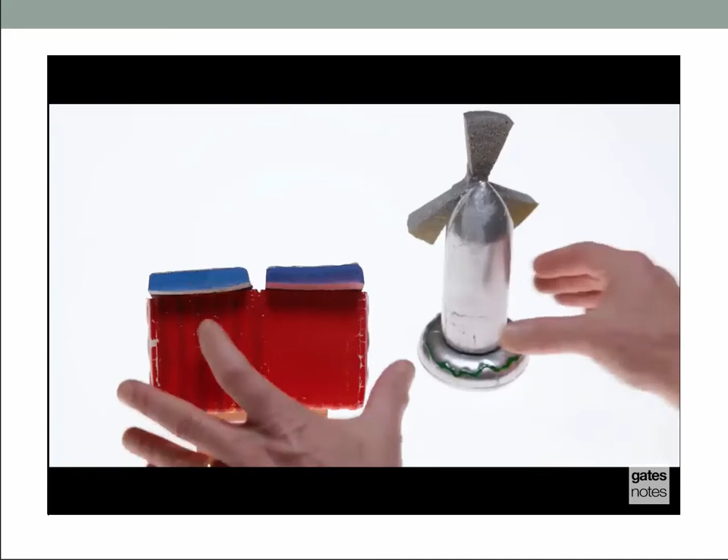Well, let's talk about climate change. Now, people think, hey, aren't we getting solar panels and windmills to be a lot less expensive? And isn't that helping reduce greenhouse gases? And the answer is absolutely. But there's a lot more to do than just taking electricity to zero emissions.

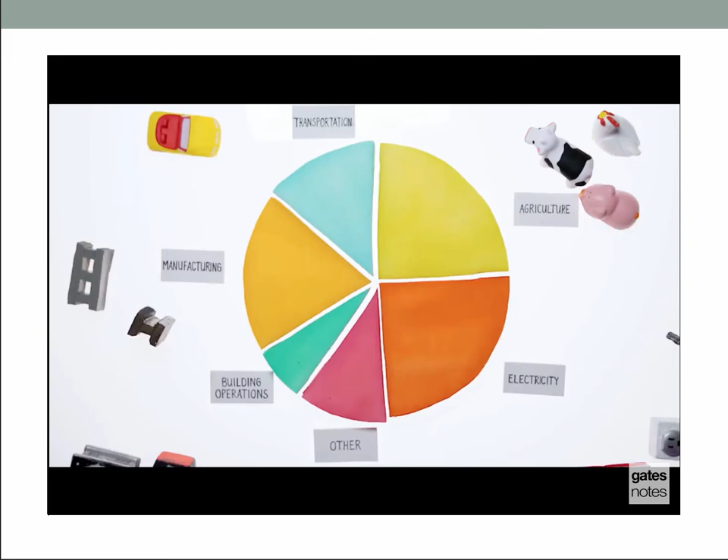There's a variety of things that generate greenhouse gases. We have a lot of sectors of the economy, like manufacturing, that are emitting greenhouse gases that aren't talked about as much. Manufacturing, everything we make, even a cute little squishy like this, that's emitting 31% of the greenhouse gases.

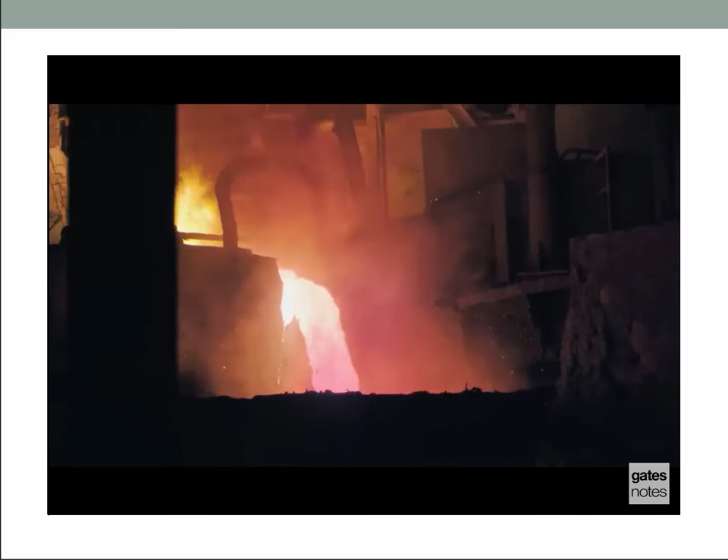The number of buildings in the world is going to double by 2060. It's like we're going to build a new New York City every month for the next 40 years. It's a gigantic amount of materials. Steel, cement, wood, all emitting greenhouse gases. We're going to have to figure out how to make all these things in a different way. And so we're going to need a lot of change, a lot of innovation to bring the emissions from all those areas down to zero.

So Bill Gates tells us we're talking about rebuilding New York City every month for the next 40 years. That's crazy, but a good estimation with urbanization and our crumbling infrastructure. And so what does that mean for civil engineers? There's a lot of emissions. And so we need to understand how our materials are made, how we can make them greener, and what impact we can have as civil engineers. And that's what Civil 115 is going to start you on the path of understanding.

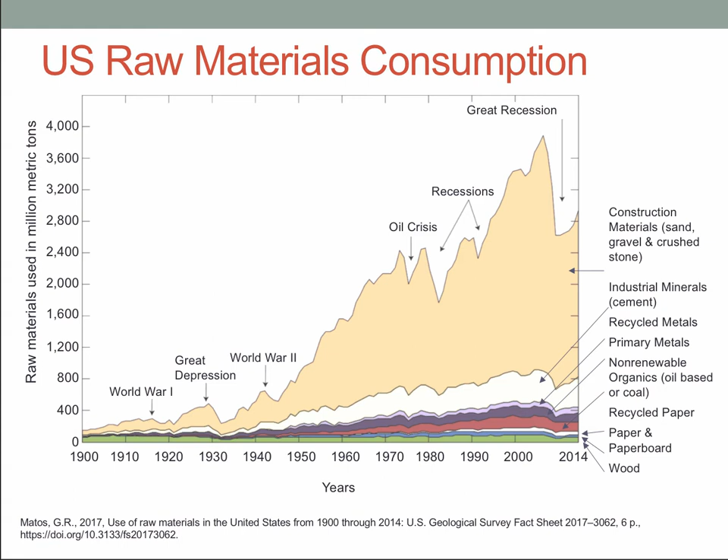Now, when we look at, not only are we greatly increasing the number of raw materials we're consuming, we have to look at too, are we consuming renewable or non-renewable materials? That same report let us know that back in the 1900s, we were about 50% usage of renewable materials and 50% non-renewable. In 2014, that was 4% of our raw material consumption being renewable materials. And we have to look at that if we want to look at how we say sustainable in what we're doing.

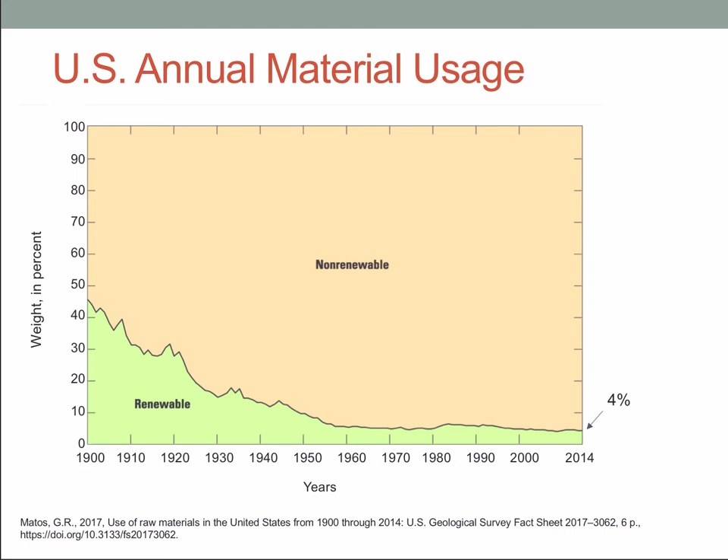Now, you could say, well, gosh, if you look at that increase in material usage, it really happened after World War II. There was a baby boom, we had a huge population growth, and that's true. But if we look at not just the US, but the world growth in raw material consumption, we actually see between 1961 and 2012, the population grew by 228%, but our consumption didn't follow that path. For steel, that grew by 426%, and much more concerning is our cement, which grew by over 1,000%. Wood we can actually see reduced, which is interesting. Plastic shows the greatest increase, but we do need to remember that was invented in the 50s, and so its growth is going to be exponential in that time period.

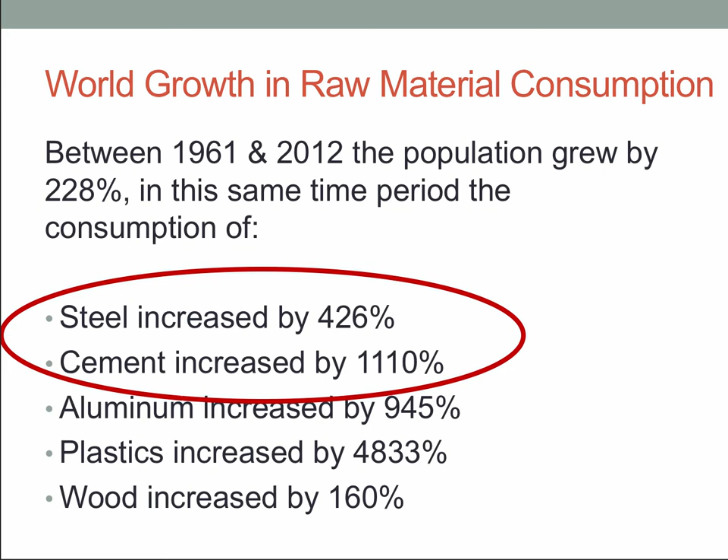Now, I said that the increase of cement was really, really concerning, and to understand this and understand its implications, and something that's going to be really important for you throughout the quarter, is knowing the difference in cement versus concrete. They are not the same thing.

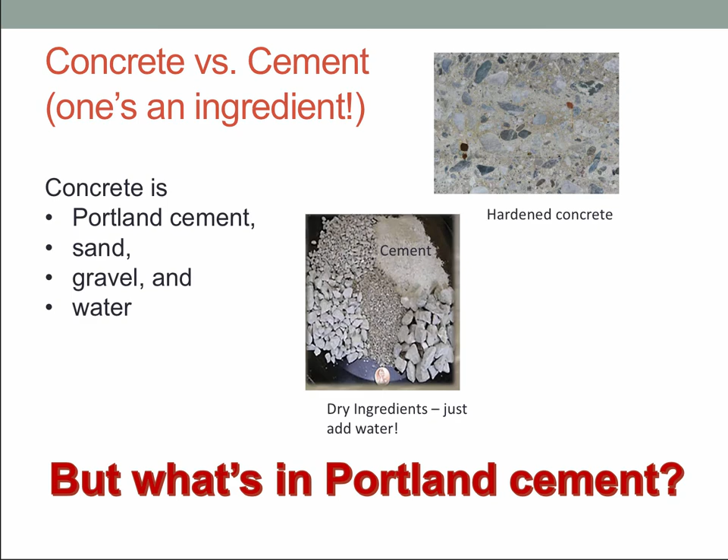Now, cement is an environmental hazard. And why? What is in Portland cement? So we need to really look at this. And we could wax poetic about the cliffs of Dover, the white cliffs of Dover in England, because they are made from limestone, which is calcium carbonate, which is one of the main ingredients in cement. So here's how we create cement. We will spend a week and a half or more going deeply into what's happening inside of cement so that we can actually learn how to make it greener.

In the big picture, we start with our white cliffs of Dover, our calcium carbonate limestone. We add to that some clay, because clay has silica in it, a silica structured molecule. And we mix it together and get it really, really hot.

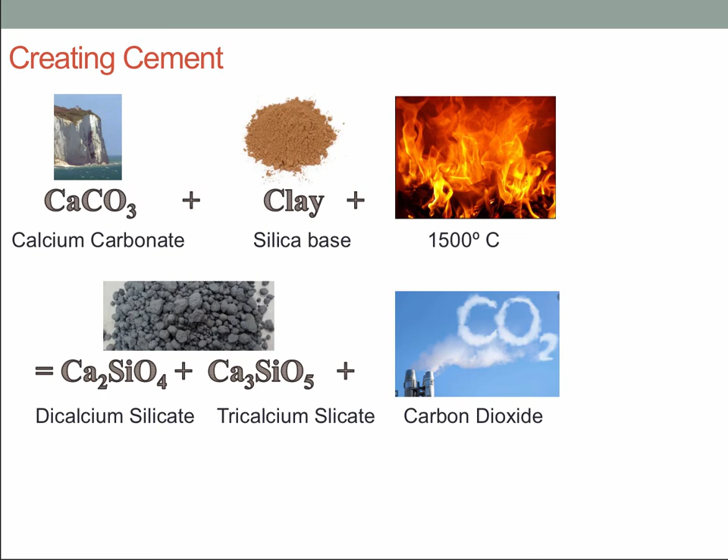What happens is that heat burns off carbon and oxygen, creating CO2, and leaves us with calcium and oxygen combinations called calcium silicates. They could have 2 calciums or 3 calciums, so they're tri or di calcium silicates. Combined, we just call this clinker, and it looks like the ground up little gray granules you see in the photo.

We take that clinker and grind it super fine, like flour, mix it with gypsum, which is the white stuff inside of drywall. That together is literally what cement, or the Portland cement that's most commonly used, is.

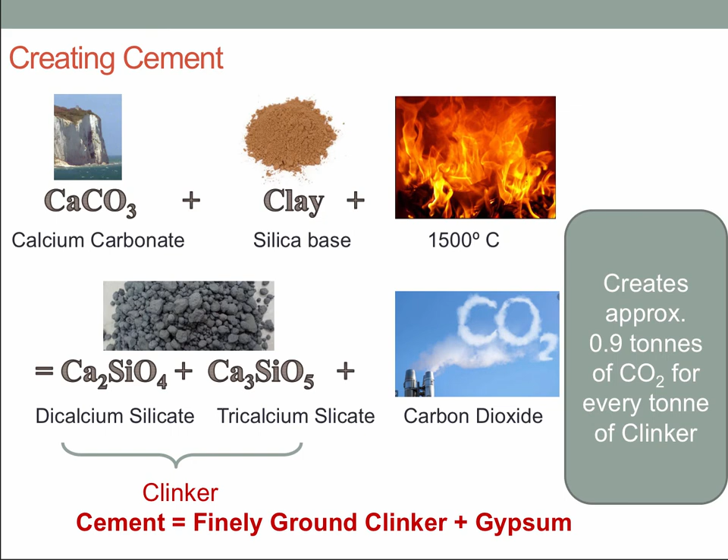But then we get all that carbon dioxide that's literally just a leftover, and that's a problem. Depending on the studies, some will say a little less than 0.9, some will say more, but about 0.9 metric tons of CO2 are created for every metric ton of clinker created. So it's almost a 1-to-1 ratio, and that's concerning, because cement is considered responsible for at a minimum of 5% of all CO2 production in the world annually. So why do we build with it?

What about other materials? What about steel, another material that Bill Gates mentioned? We can have hot rolled steel or structural steel, like the wide flange beams you designed in 44A. Or we can turn steel into thin sheets and bend it permanently at room temperature, cold forming it into other shapes like steel studs, and build a house out of it, or the walls you might put to create partitions and offices inside your structural steel building.

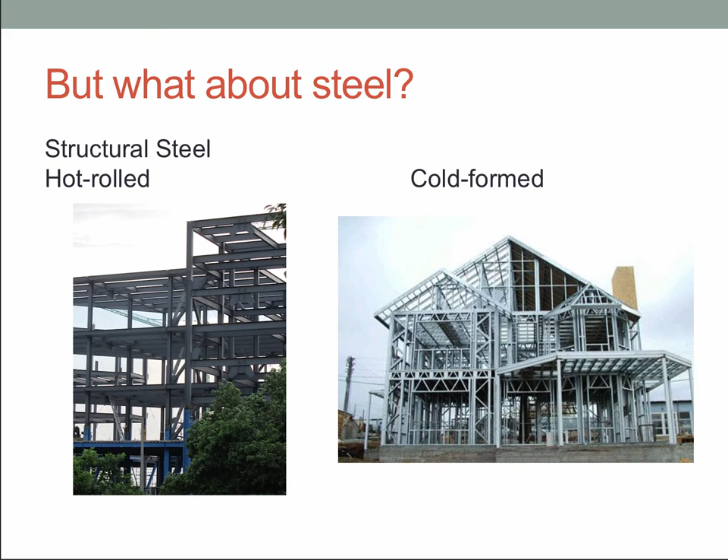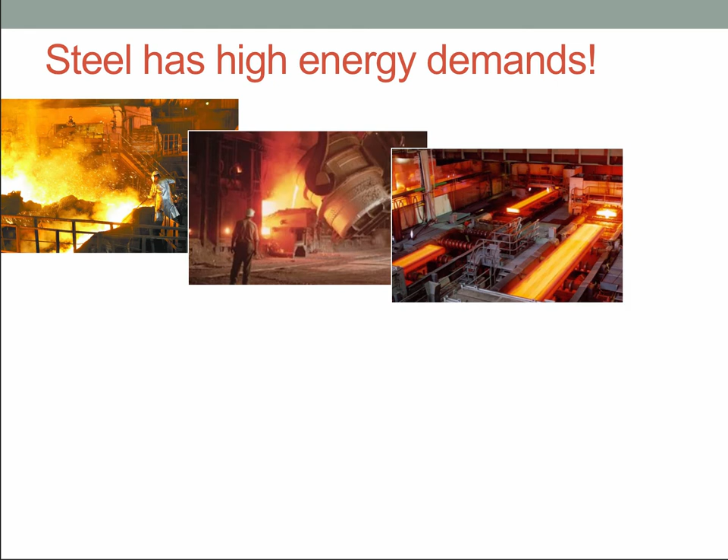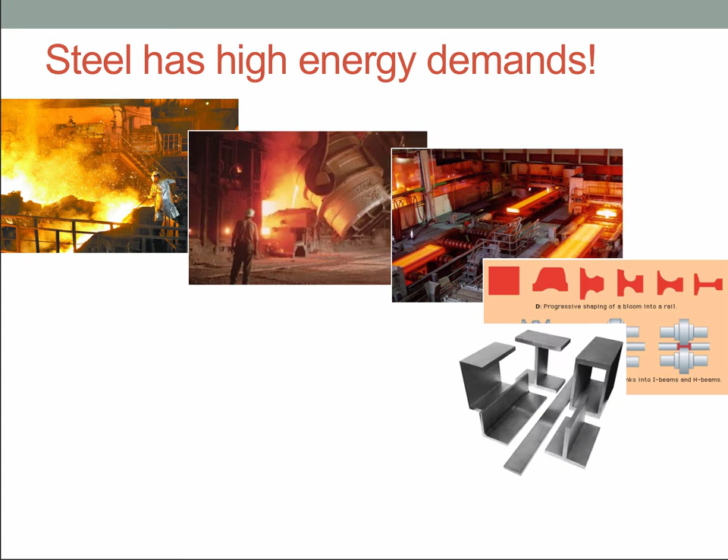The problem with steel is it has really high energy demands to make it. We have to get furnaces hot enough to melt all the products that go in there. Once we have this hot melted steel, we put it in a cauldron, and from that cauldron we can pour it into molds. These molds are still hot, molten, malleable, so we can run them through high energy systems that will push the steel into the shapes we want and get our hot rolled I-beams or whatever shape you're looking for. Here are possible shapes you could have that are hot rolled.

You could also roll it into very thin sheets of steel, which would get cut to width, and then cold forming occurs as an additional energy requirement to give you different interesting shapes you can build with. So we can see there's a lot of energy involved. It's not renewable, though it is recyclable. So let's forget steel, let's forget cement and concrete, because nothing in there is renewable.

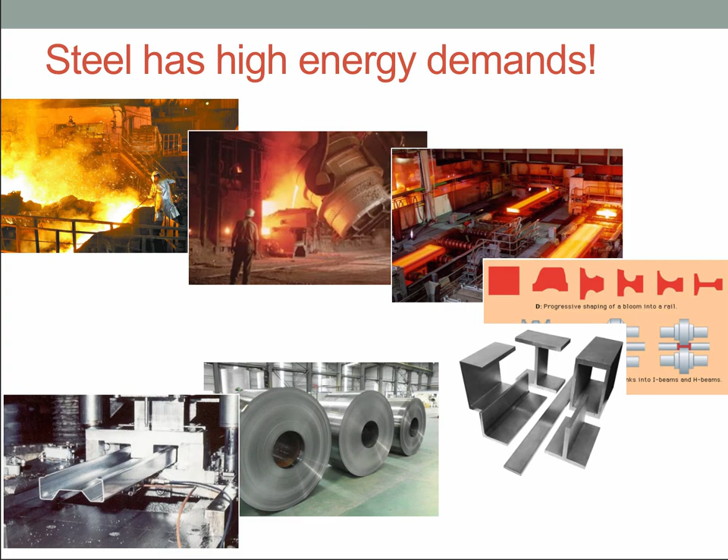How about we go to wood? Wood's going to be greener, right? In fact, maybe 90%, if not at least 80%, of homes built in the US are built out of wood. We use it a lot. Well, we have some problems with wood as well.

Aside from the fact that we're getting smaller and smaller trees that we're cutting down, so we absorb less CO2 through photosynthesis—younger trees don't absorb as much, so our forests are not as productive in their carbon storage—we're also cutting the trees down so young that the wood itself is not as strong. This photo here, you'll know how to look at before the term is out, and be able to tell, wow, those were really young trees that were cut. We'll come back to that photo later in the quarter.

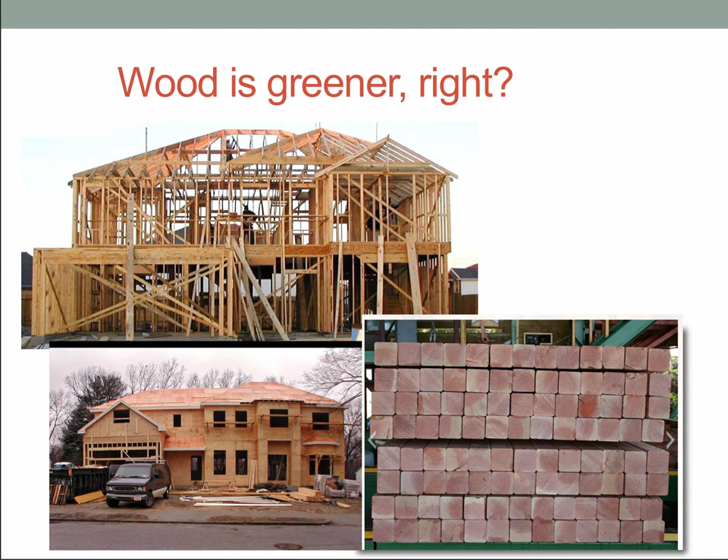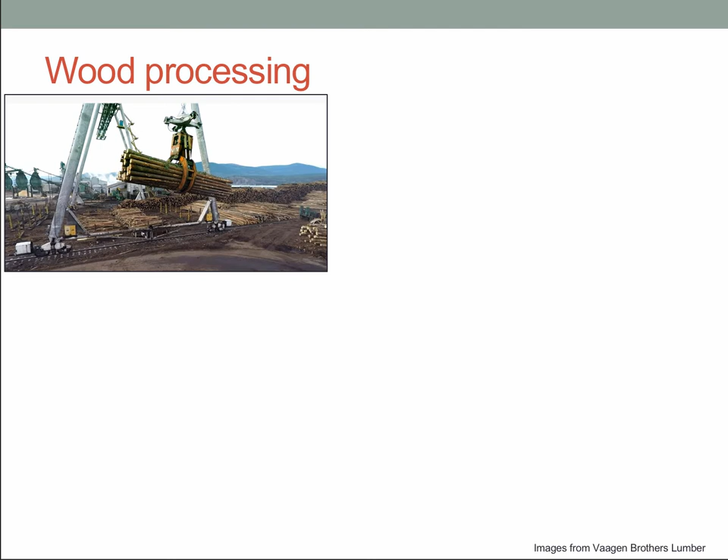And what about the processing of wood? Is it energy free? Well, let's look at it. We have heavy machinery that's lifting and moving, and it's a very automated process. Here's a heavy crane that's moving back and forth on rails to move the wood. The wood goes through conveyor belts into the mill, and is run individually and sawn.

Once it's sawn into shape, it actually has to be kiln dried because we need the lumber to not have too much moisture, otherwise it's not strong enough. So you have to heat it, and it can sometimes be over a month in these kilns to get all the moisture out, because we can't dry it too quickly. Once it's dried, it goes through additional processing to clean up the edges and finish it properly, and finally the machines sort it and stack it into the heavy stacks of lumber you see heading off to a lumber yard like Home Depot.

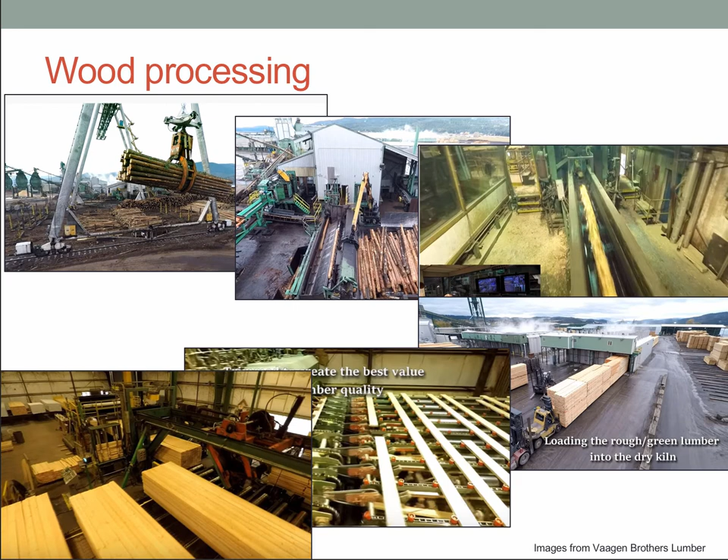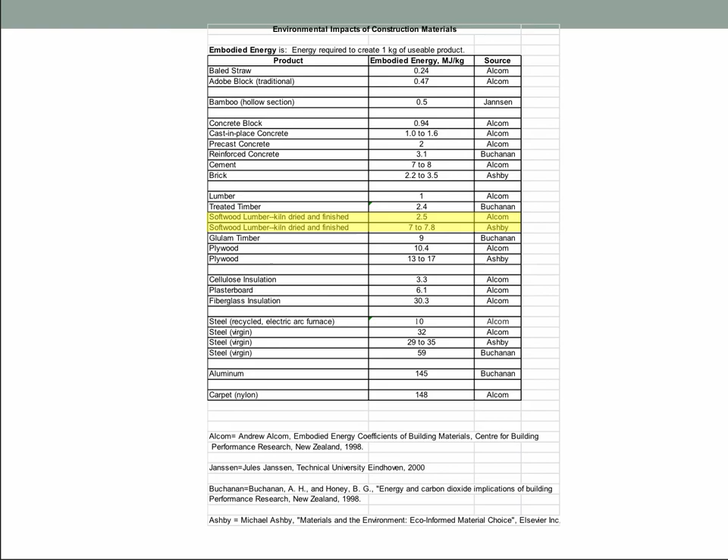And all of that, you can imagine, takes a lot of energy. In fact, there are some tables out there showing just how much energy is embodied in each product. So here is a table—I'm going to highlight our lumber. We see softwood lumber, kiln dried and finished, can use up to 8 megajoules of energy for every kilogram of product created.

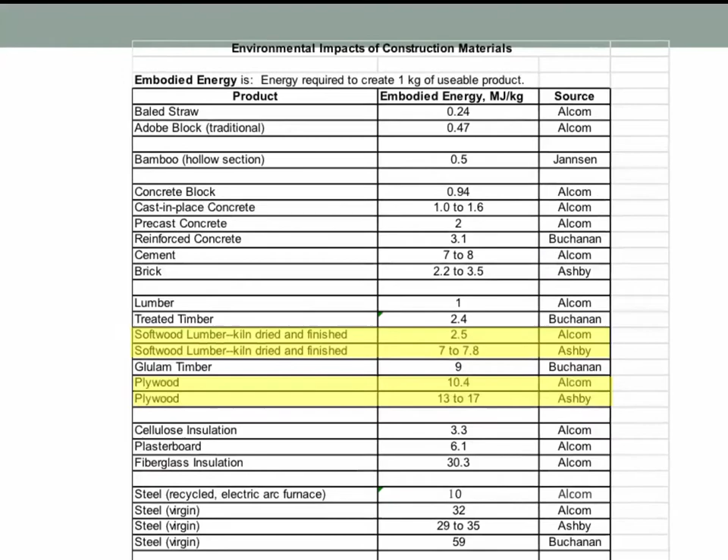Plywood, because of its processing, uses even more energy. In fact, the energy required to make plywood is similar to what you would get for recycled steel. Now, virgin steel that uses no recycled metal in it is much higher in its energy demands, up to 32 megajoules of energy for every kilogram created.

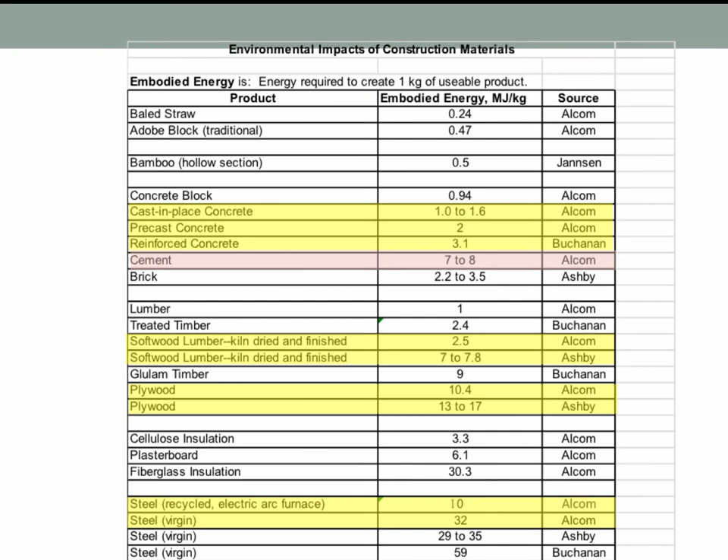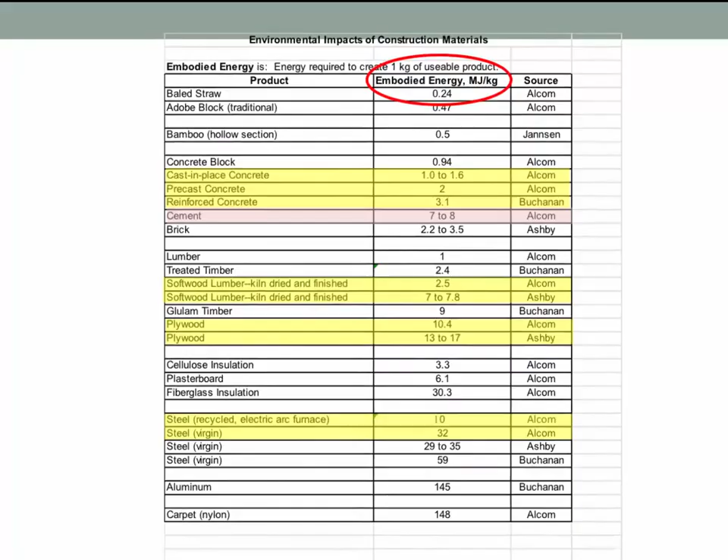And finally, we can also look at concrete. Remember, this is our finished concrete, including the aggregates inside of it. It actually has the lowest megajoules. When we look at cement, highlighted in pink, that's up to 7 or 8, which still seems low, similar to wood, megajoules per kilogram.

But what's really important to remember is this is not the end of the story. This is megajoules per kilogram of product, and a concrete structure of the exact same size weighs significantly more than a steel and way more than a timber house. So you'll actually get to, as part of this class, look at the embodied energy in a building, not just in the materials, because that's really important as we look at it.

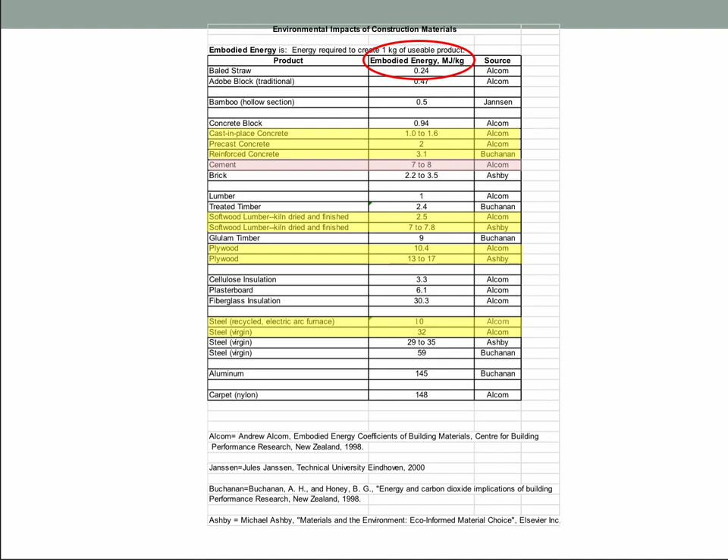And you can imagine, as we have all of this embodied energy, something has to give us that energy. And how much greenhouse gas are we creating? We can actually look at the greenhouse gases, often reported as CO2 equivalent, that's the CO2e. But we can actually see fossil carbons emitted in production.

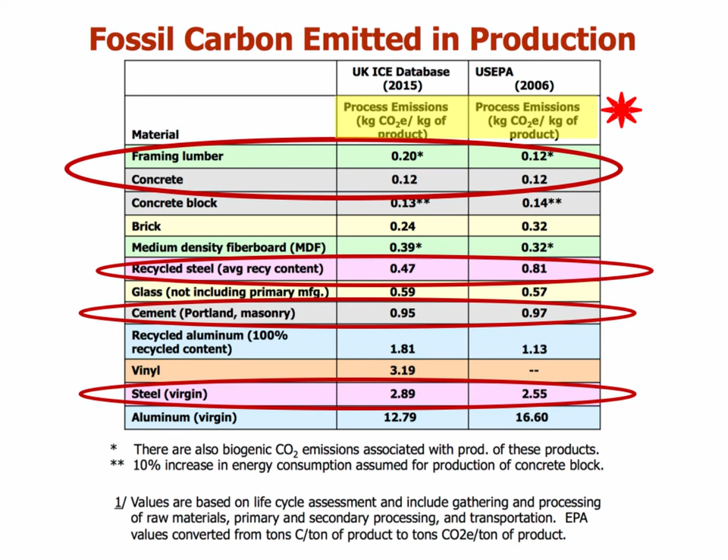Now, for our renewable products, or at least our timber products, the story actually gets better, because that's just how much is used to process it. But timber, and again this is per kilogram, timber absorbs carbon during its life, and so it actually has stored carbon inside of it. If we include that carbon storage from photosynthesis, we can see that our wood products could be considered carbon neutral or even carbon negative.

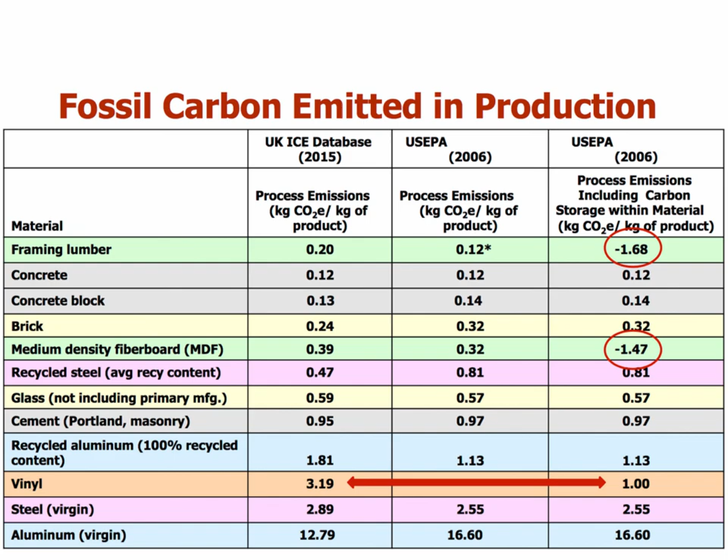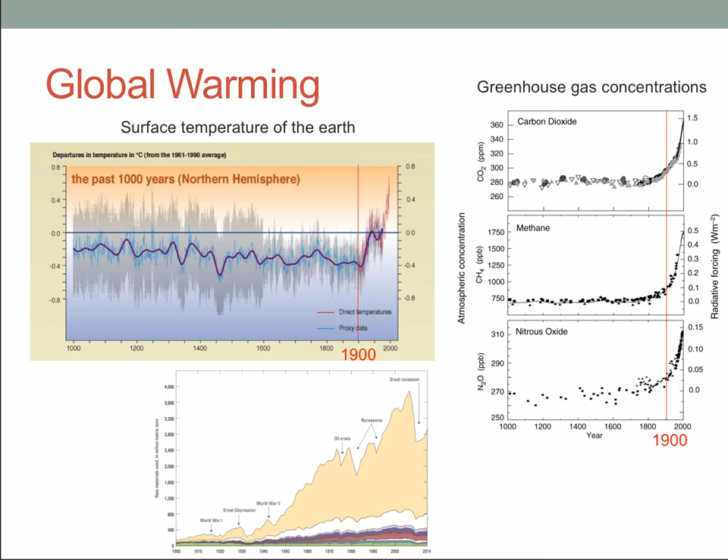And if we remind ourselves of our raw material usage plot, we can even see a correlation there. So what does this all mean to us? What is our role as civil engineers to understand these materials, to understand potentially how to design for greener materials, and what materials we're going to use on a project so that we can keep the project as green as possible. And so the things we're going to cover in Civil 115 is going to be your introduction to understanding these complex questions.

So our key learning objectives: you will be able to compare and contrast the properties of these conventional building materials, steel, wood, and concrete, and be able to make recommendations regarding not only their structural properties, so they're as efficient as possible, but also the environmental implications and their durability and sustainability.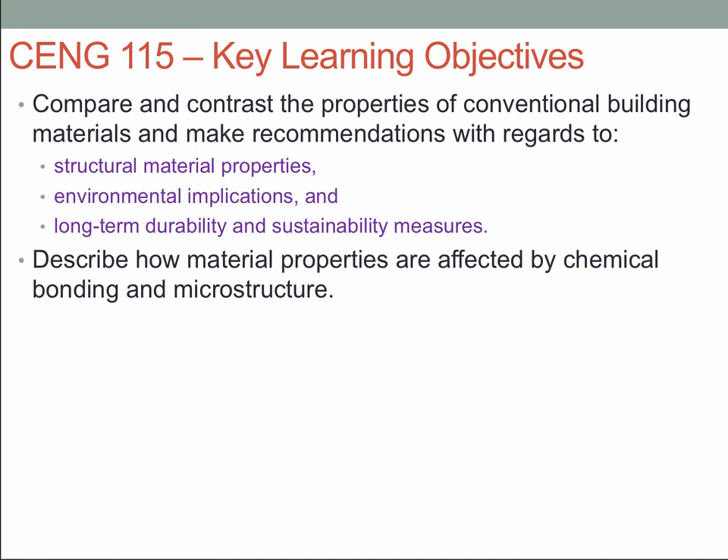We'll look at how material properties are affected by the chemical structure and the microstructure, even as much as at the atomic level of these materials. So there's some science happening behind this. You're also going to be able to make reasonable assumptions about the properties of these materials based on their atomic structure or how they're made.

And then also, it's important to know the common mechanisms of degradation and how to prevent degradation. Steel rusts, concrete corrodes, wood rots. How do we protect them so that our structures are more sustainable?

And finally, sustainability issues are not just in developed countries, but they're in underdeveloped countries that are now growing and developing. And how do we look at materials so that both countries are able to move forward in a green manner?